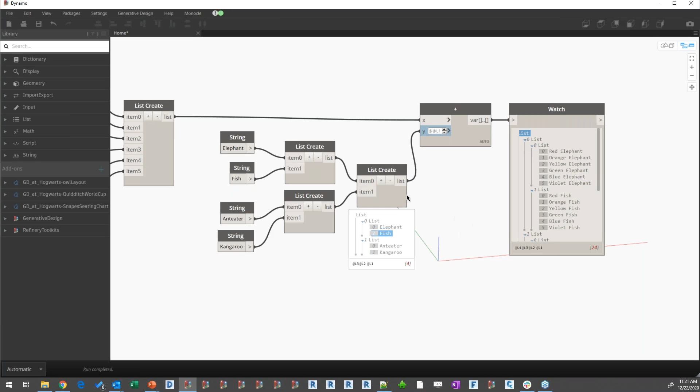And when I hit this, notice what happened to my list structure. I now have 4 levels on my list. I've got my first list here, which is the original list for all of this stuff. Then I've got this list, which contains my elephants. Outside of that, we've got the list that contains the elephant and the fish. We've added 1 level to the depth to attain sort of all the lists that we mixed with it.

But it does allow us to sort of more quickly get that content processed through. Now, a common application of this - let's say you guys had a list of files or list of values that you wanted to set from Excel into Revit elements. We've got 300 different parameters that we want to set on for 500 different walls, or maybe it's 5 parameters that you want to set on 600 walls, or whatever it is.

You could place an element set parameter value by name for every parameter. 5, maybe that's attainable. 300, you're going to go insane. Instead, you can handle all that data as one list and then just use list levels to make sure that it's processing the data for each of those pieces individually correctly. It is a little bit more complex because you've got that third input there, but it's definitely something that can be done.

All right, let's pop back over into the presentation. So we showed this stuff. Actually, this is the end of the presentation - this is the end of the slide decks that I had prepared for today. So do we have any questions in the chat yet? If not, we can try and pop over and give a Revit example of this.

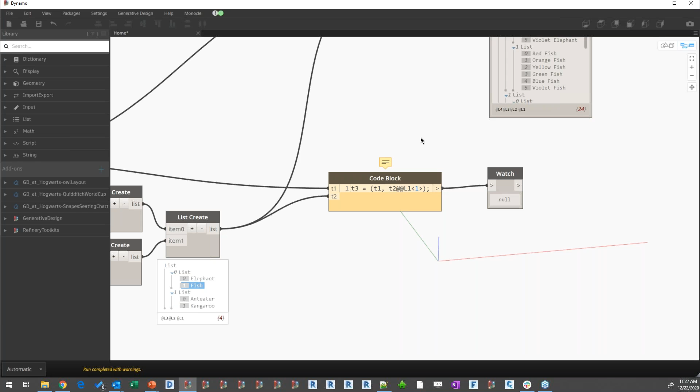Let's try changing this out for a plus, and then I think that should... yeah, there we go. So if you do see that add issue, that is something the Dynamo team has found and has already got a fix out.

So to tell it to work at a given level, it's that at sign. If I wanted to not maintain my list structure when we force the list level, it's a single @ sign. If you want to keep that list structure, it's a double @ sign. And in all cases, once you start to get specific about your list level, so it's at and then level 1, when you do that, you also have to start to manage your replication manually. So this is saying basically longest lacing by putting that bracket in carets like that.

Sol Amour's Dynamo DesignScript presentation has some more detailed examples of that, but hopefully that answered the question for you today.

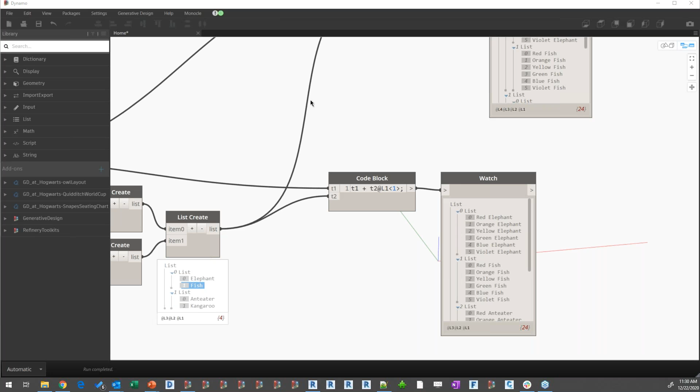Yeah, if you're using a laptop without a graphics card, you're going to have a few different issues. The first one being you're not going to see any of your background preview. Dynamo does really need a graphics card in order to work well. The second issue that you may start to see is there are actually, if you're not even seeing the node show up, like in your library, do you have a geometry menu?

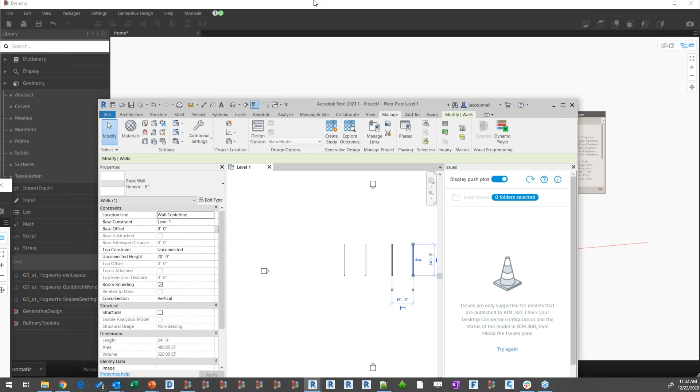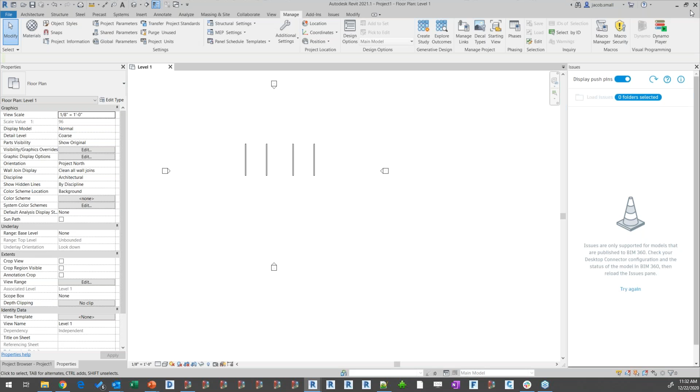Yeah. All right, and it looks like Fred is asking, is there any AutoCAD applications? Yes, there's actually a lot. You can actually leverage Dynamo with Civil 3D directly. So if you've got, actually it's not just Civil 3D, Civil 3D or Advance Steel directly. So if you've got access to either of those AutoCAD verticals, you can launch that way. Once you're in sort of the Civil 3D environment, you open the DWG you want to process, open Dynamo for Civil 3D or Dynamo for Advance Steel. If you have Advance Steel, you can do this as well, and then start to manipulate that content. If you don't have that, it's a little bit more difficult. I don't have it installed anywhere at the moment, but there's a package called Link DWG, which will allow you to manipulate Dynamo from the active AutoCAD instance from whatever Dynamo version you're in. So if you're in Dynamo for Revit, you can manipulate the open DWG in your other AutoCAD environment. It is a little bit less stable because of the core technology it involves. The documentation is a little bit difficult to get to work with, but it's definitely doable. In either case, I would recommend the Civil 3D version though. It's going to be like 1,000 times more stable. And if you've got the AEC collection, you should be able to launch that, I believe.

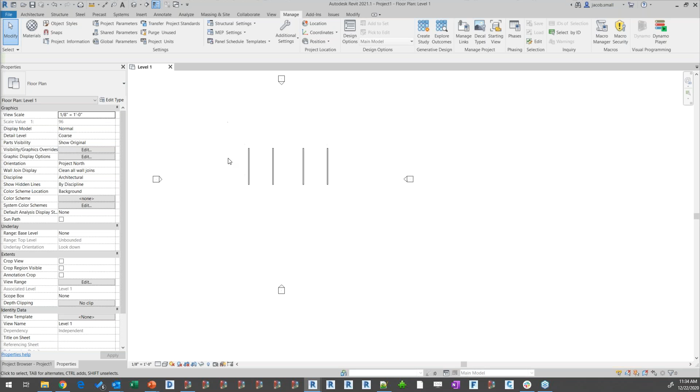All right, so we'll get started with this. So you can see I've got 4 walls here, right? These 4 different walls, let's say I wanted to set a comment and a mark for each one of those pieces based on some external data or some other method that I've sort of worked up.

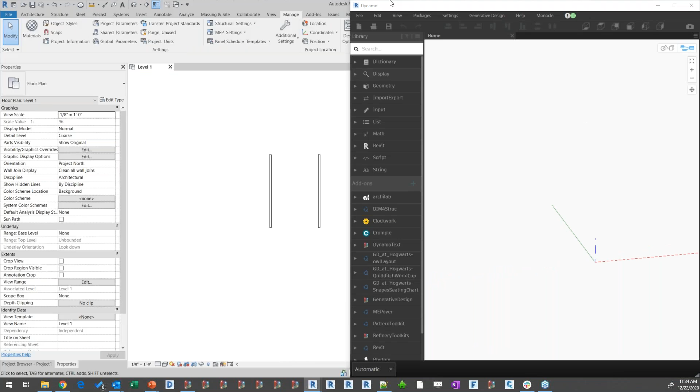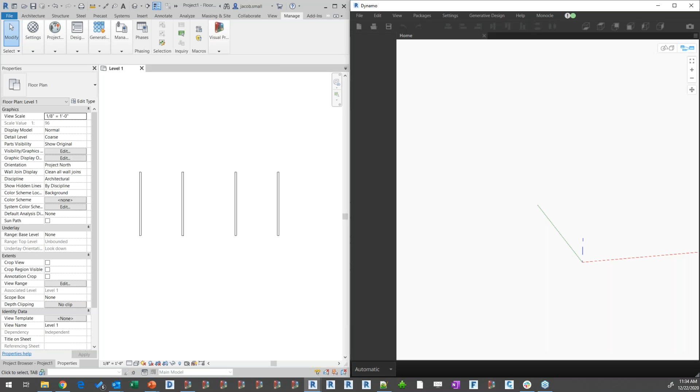So when I'm working in Dynamo Revit, I do this a lot. I like to split my screen where I can see Dynamo on one side of the monitor and my Revit environment in the other, and then I'll often go full screen with Dynamo once I start to go a little bit further. But it does mean I do like to minimize my properties palette a little bit, minimize my library palette quite a bit, just so I have a little bit more working space.

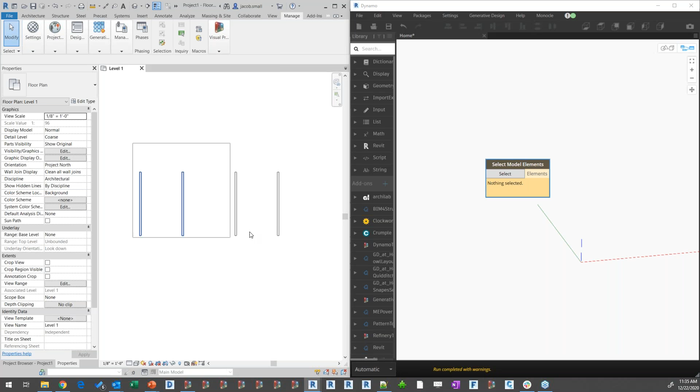So the first thing we're going to do is we're going to select some model elements. Come in here, and that's going to allow me to do box selection, right? So just like within Revit, if I go left to right, I've got to completely encompass whatever wall it is that I'm after. If I go right to left, I can do a cross. So once I get all 4 of those things selected...

We need now 4 new mark values. So the way I'm going to do that is I'm going to make a range from - we'll do design script for this - 1, 4, right? And I know 4 because I know it's 4 walls, but if I didn't, I could use a list.count.

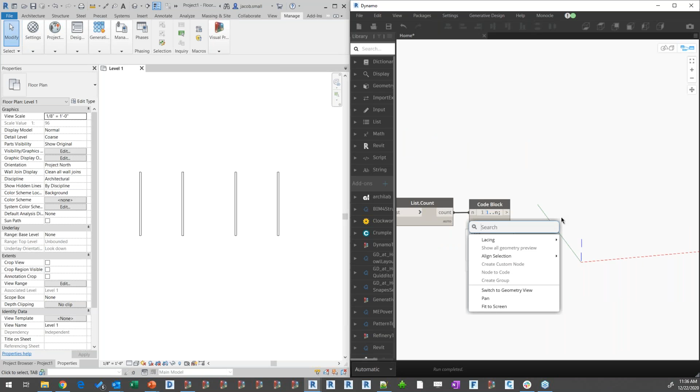And then instead of 4, we could use a variable here. Let's call this n. Start at 1, go to n, 1, 2, 3, 4, right? And then we're going to do another plus here, just like we did before.

And then I'm going to type a string. And I'm doing this in a code block, which means I have to incorporate the quotation marks as well as the semicolon at the end of the list there.

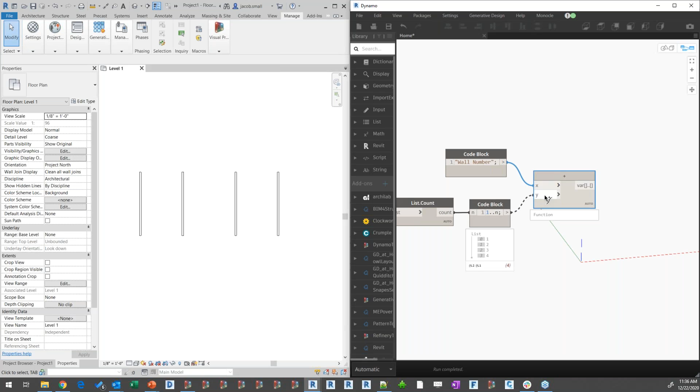And now when I join these 2 together - wall number, oh, look at that. Let's put a colon and a space, wall number 1 through 4.

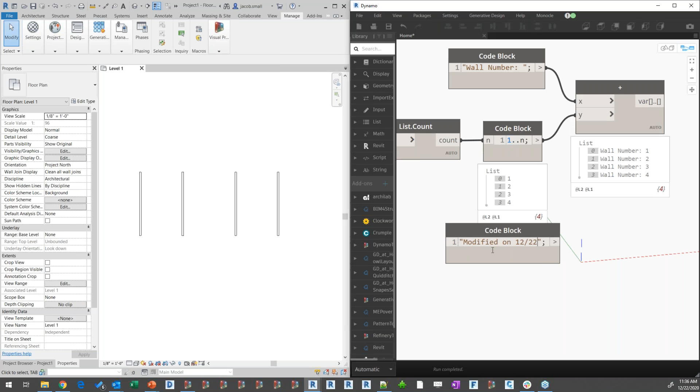And then let's set a comment value as well. So here, whoops, a bit big with my copy there. And I'm going to put that modified on piece right there as well.

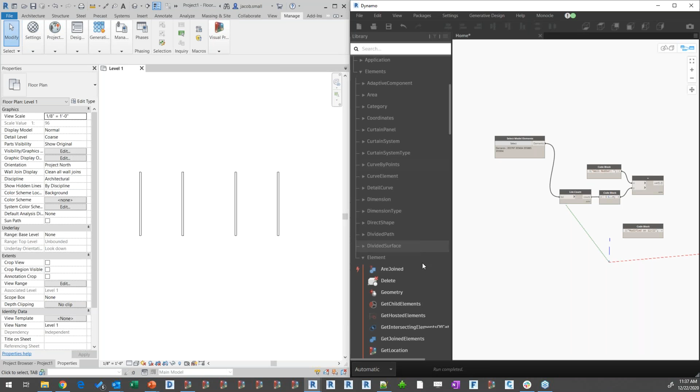Okay, so now I'm going to look to set the parameter value for those particular elements. So I'm going to come up into Revit, under Elements, Element. So I'm working with an element. Most things in Revit is an element, so we can do a lot of stuff in our Elements menu. You can see there's this set parameter by name node, right?

I'm going to go big on my Dynamo node because it's getting a little bit difficult in terms of the amount of stuff that's on there. So this takes an element as the first input, a parameter name, and a value.

Well, let's first take our parameter name of mark. We're going to use a string node for this, and then another parameter named for comments.

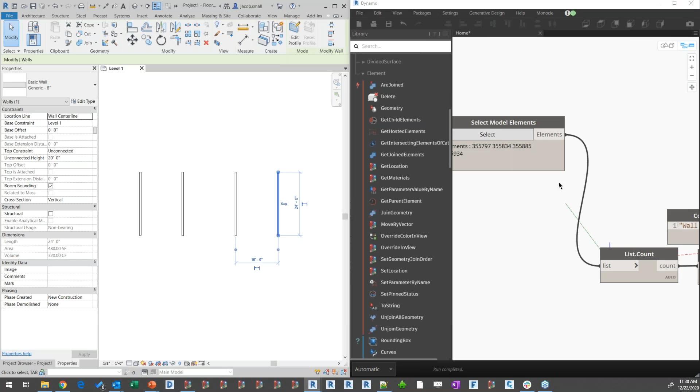Let's just see if we can confirm, do these pieces have a mark and a comment, right? So one way we can do that is you can come over here and look in the parameters for the active element itself. Remember, just like in Revit, if we want to set up a type property, we have to go in here and edit type. You're going to have to do the same thing if you want to set a type property in Dynamo.

The other way we can do this is we can take an item out of the list, and then we can say, element, what are your parameters with an element.parameters node. And this is a list of every parameter that that element has, everything that I can modify about that element by just feeding a new value, right? So it's got its category, it's got its base offset, its area, image length, right?

All this different stuff. Now, some of these are going to be read-only, right? I can't set the length, I can't change the category, but it does store that parameter for us, which is really good. So you can see there is a comments with an S parameter, and there is a mark, no S.

I'm going to create a quick list.create to pull the two names of my parameters together, give myself a little bit more room, and then it's going to ask for a value. So now I need a list of these items and these items.

Let's actually modify this. I want to have a whole list here. So 22... minus n. And Dynamo's not able to run because I've got a Revit command active.

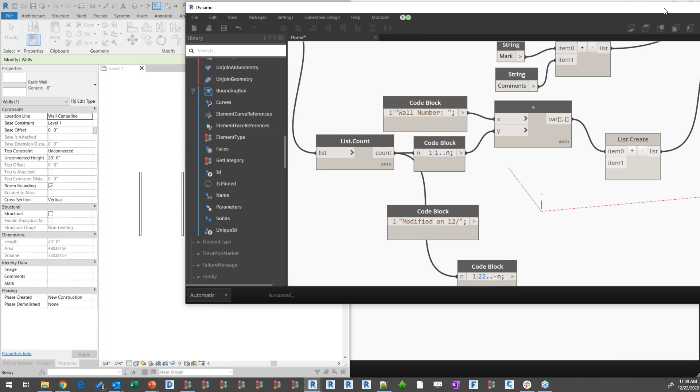What is happening? Looks like Revit is in the midst of forcing me to quit. Sorry about this, guys. Let me save this and see what happens.

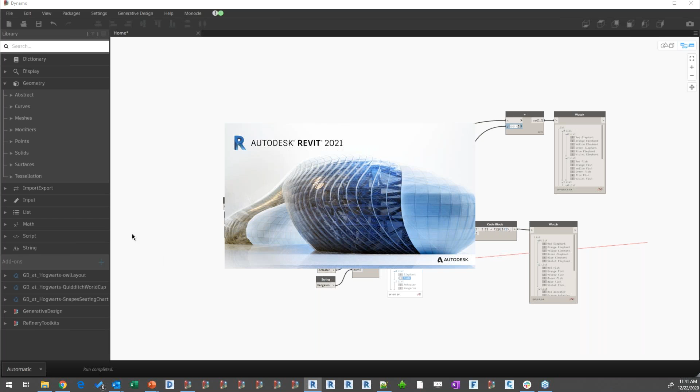So it looks like Dawn is asking, can you go over using the pound sign when using range in a code block? Absolutely, that's an easy one we can cover while that builds up.

So the basic syntax of building up a range in a code block is: what number you want to start at, two dots, what number you want to end at, two dots, and what number you want to step by. So now I can use some numbers. Let's start at 0, end at 12, step by 2.

And I don't have to put those in as variables, right? I can put them in as hard-coded numbers if I want to.

Notice if I say end at 11, but I don't get there based on my step, it's not going to include that last number. What I could do instead, if I knew I wanted to end at a given number, but I knew how many steps I wanted, we could use a pound sign right here. And this is now, instead of going to say start-end, it's now going to be start-end-count. And we do have to have that pound sign, that hashtag sign, in there.

And this is a count of 2. More likely, instead of a count, we would want to say end minus start divided by step.

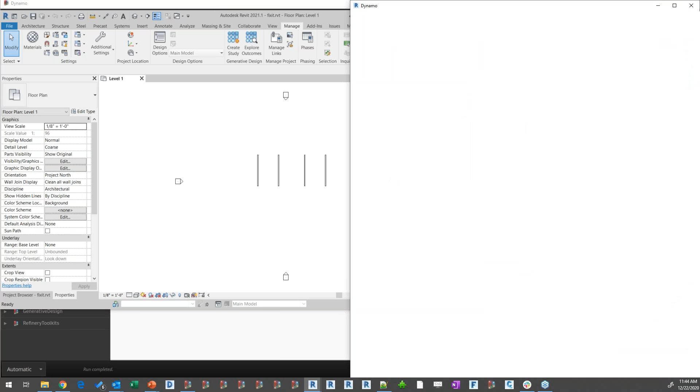Okay, so it looks like Vincent is asking, how do you compare a linked Revit model parameter value to an existing model parameter value?

So if we wanted to compare a value of a wall, let's say I had this wall in a link and I wanted to compare the mark on the wall in the link to the mark on the wall in my model, what I'd have to do is get the linked element out of the link.

Genius Loci has some great notes for that. Archilab has some notes for that. Bimorph has some notes for that. There's a dozen different ways - I think Rhythm and Clockwork have some notes for that too. A dozen different ways to sort of start to expose those linked elements so you can work with the actual element itself.

You can't work with the link holistically, right? Your link object is one thing, but then we have some additional pieces inside the link, and that's really what we're after. Once you have those two, you can start to compare the two pieces. Now the key piece is, how do I know which ones I want to compare?

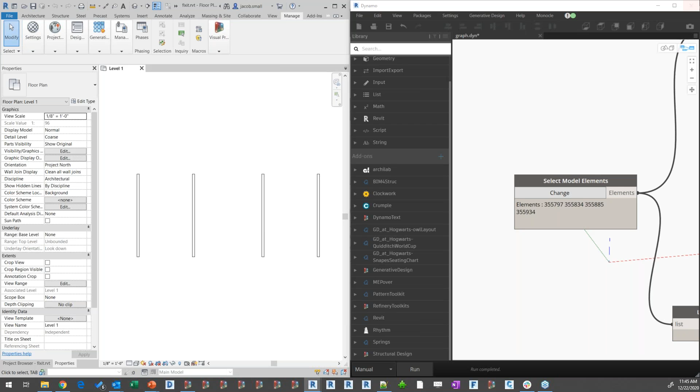Because if I say get me this wall and get me that wall, there's no guarantee that unless you're manually selecting those two pieces, that you're comparing the right values or the two right elements. So a lot of times what you'll wind up doing is using the GUID, the globally unique identifier, to make those two pieces consistent. But you do have to select the element in the link rather than the element in the model itself, or the link model itself.

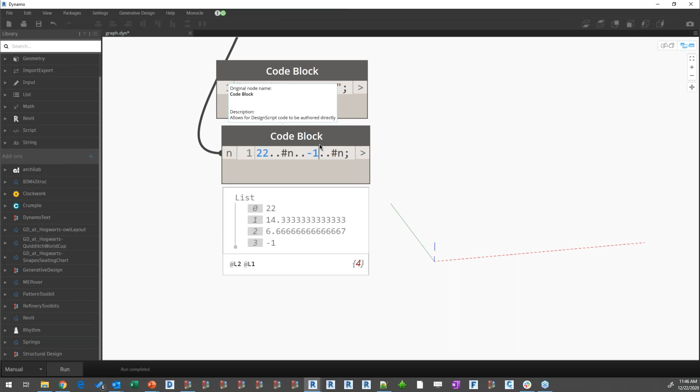So you can see here, 22 minus n is going to go ahead and give me the values from 22 to 18. We can also say 22 minus 1 number n, and this is probably more likely what we're after. 22 number n minus 1 - my bad, there we go. 22, 21, 20, 19, and then we can just use the same plus node that we've used before a couple times now to join those two strings.

1222, 1221, 1220, 1219, and then we'll bring this guy in here. So now we've got the list of all the values that we want to join up in one list, and we've got the list of the marks and the comments. Now let's go ahead and wire our elements in, and let's see what happens. We're going to watch the mark and comment field, right? These two fields right here that happen to be next to each other - that was intentional on my part for once.

Here we go. Now I'm going to hit run, and it only pulled through the wall number, right? Why is that? Well, we've got a list levels and lacing issue going on here, right? So what we want to do is try and adjust those list levels.

Now, one thing that's going to be pretty tough is the way I have these set up. I've got mark, comments, and over here - whoa, if I set that as my mark, that as my comment, we're good, but it's not sort of paired up by the element. Let's try a list.transpose.

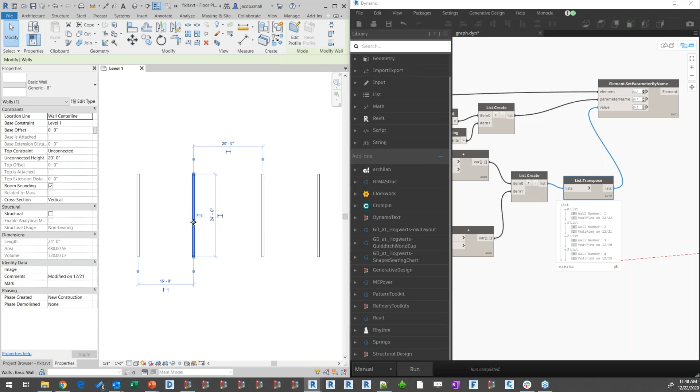Turn these guys around. All right, that's looking a little bit better, but what do we get over here? Still the same content. Let's set this down to at level 1, that to at level 2. Modified on 1221, we're getting a little bit closer. Let's set this at level 2 as well, and let's see how that runs. Wall number 1 on 1222, 1221, 1221, nothing and nothing. We're starting to get there. I'm going to take this, clear these values out.

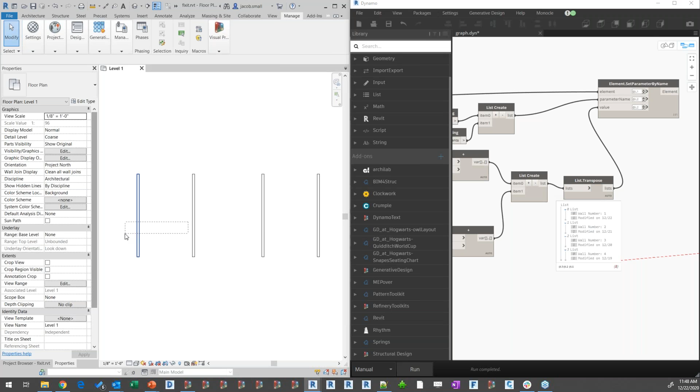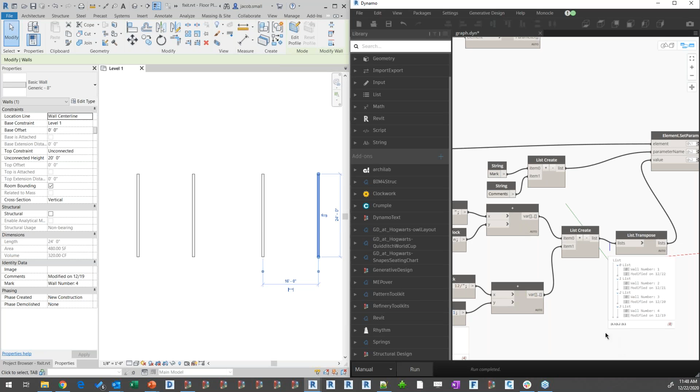And now we're going to say lacing to longest. 1 on 1222, 2 on 1221, 3 on 1220, 4 on 1219. Right, so the same order that they were sort of grouped up all seem to work. And again, that's just a matter of changing that list level and lacing. It wouldn't matter if I had 300 parameters, as long as I had 300 sets of values here, we'd be good to go. So that's a fairly classic example of when you'll need to make use of list levels and lacing, with some added code block fun in there as well.

Cool, any other questions? Not yet. So if you do have questions, definitely type them in. Oh, Heather just sent one in.

So Heather is saying, we have a common issue with Revit warnings saying elements have duplicate mark values. This is usually coming from our many light fixtures placed in the model. Can I use a similar method to change all these mark values to be different? Yes, yes, you absolutely could.

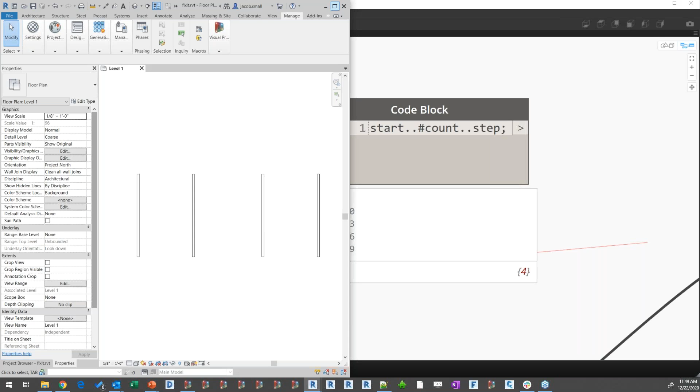So let's take an example of that. I'm going to minimize this, we'll maximize this back up. I'm going to copy these walls so that we've got many, and I'm going to highlight them all. I'm going to change all my comments to the letter A, or all my marks to the letter A. Elements have duplicate mark values - so now I have the warning which you have, right?

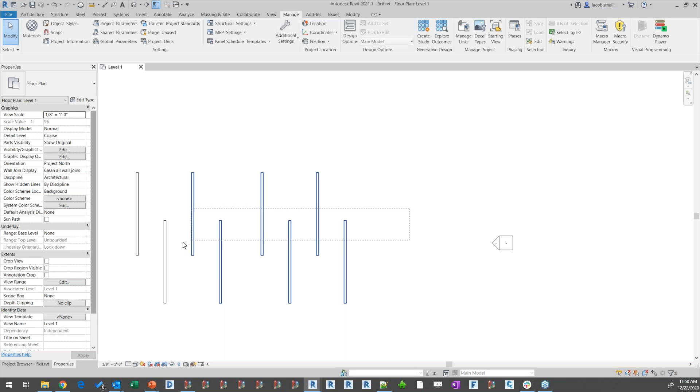All right, so there's a couple different ways you can do this. I do recommend looking into the archi-lab package, which has some great nodes for working with warnings. You can also just export out your list of warnings to HTML, use Dynamo to parse the HTML and get the elements in question. The archi-lab one's probably a little bit more user-friendly.

So I'm going to take all of these guys, pull Revit off to one side once again, and we'll zoom extend on those. I'm going to do - whoop, this is the wrong Dynamo. I'm going to do a save on this, and we're going to go ahead and say new. And then once again, we're going to say select our model elements.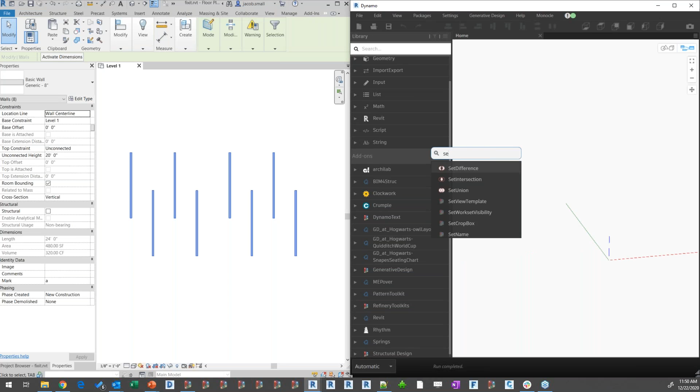Element.parameters. I'm going to pull out the first item from the list using some design script. This gets me just one, using indexing, by putting it in the brackets like that, saying the item at index 0.

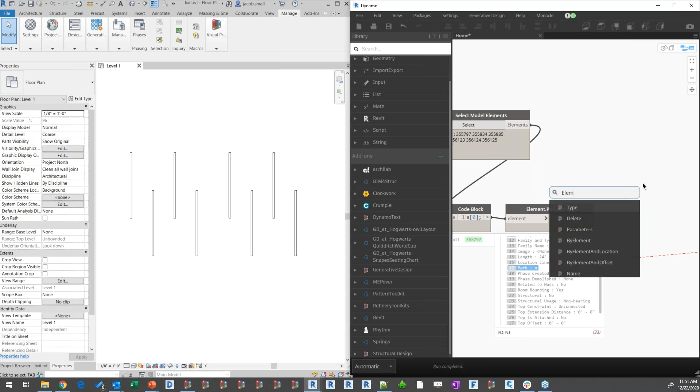If I pulled open this list, it's just going to pull that 355797. Let's look at what the parameters are, just so I know how the parameter I'm after is really spelled. Element.get parameter value by name.

Let's look to make sure that these all have the same mark value. All of these have the mark A. Let's change some of these so that these have B. Okay, so now you can see I've got some A's, some B's. They're kind of shuffled all over the place, which isn't great.

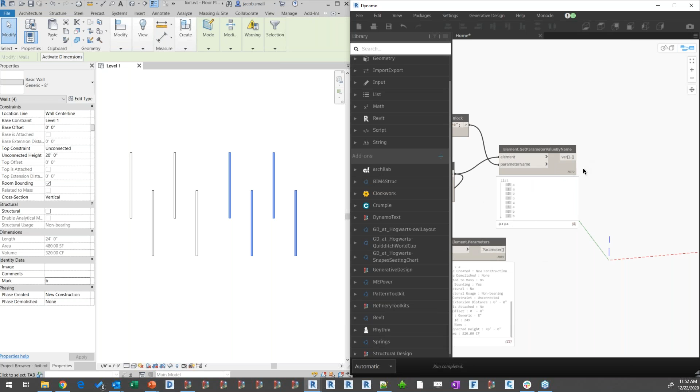I really would prefer if they were grouped by their piece. We're going to do some list manipulation. There's actually a node called list.groupByKey, which is under the organize section of our list library. This is going to take a list of items. We're going to go back to our raw elements and allow us to group it by whatever key we want.

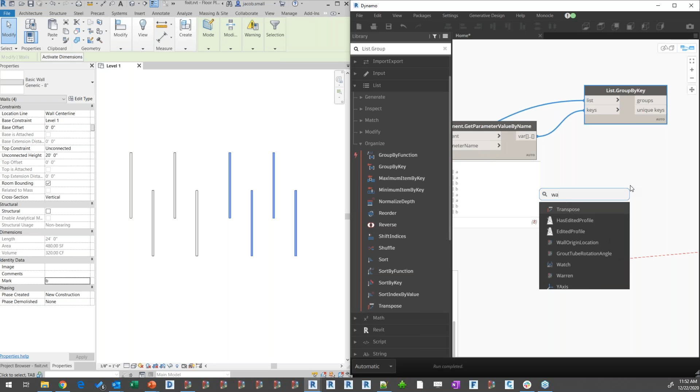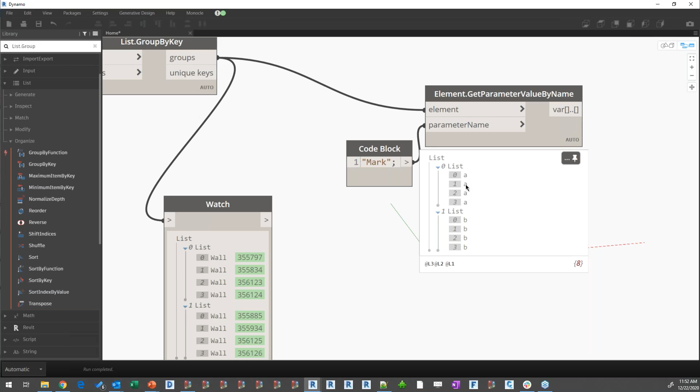Now you can see I've got sublists, right? Sublists are great. This means I've added some additional structure to my data. Now these items are grouped by whatever their mark is, and we can confirm that by dragging this over here as well. When I do the drag copy, that's just me hitting Control on my keyboard. But you can see I've got all my A's and then all my B's.

All right, let's say I wanted to add a new value onto the end of that. We're going to start at 1, then we're going to go to N. We'll use a list.count. Here we go. Let's count these items. There's 2. I probably don't want to work with just the 2 though.

I probably want to work down here. How do we fix that? List levels. Use levels right there. 4 and 4. Now we've got 8, right? 1 through 4, 1 through 4. Now let's join. We're going to put our suffix number at the end of our letters. I don't need to worry about lacing here because everything's kind of a matching list structure.

Set parameter value by name. Here's my list of elements, and here's my values. Again, everything's always in that 2D list structure, so you don't have to worry so much about that. The last piece I need is this.

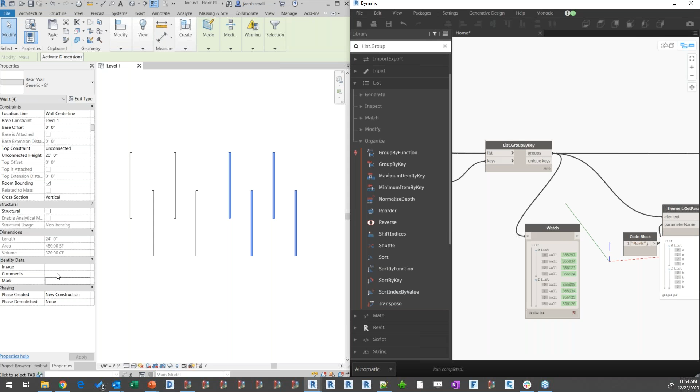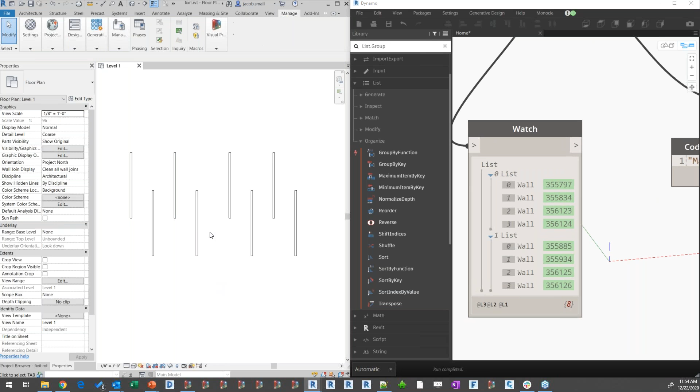Mark's no longer highlighted for all of these. B1, B3, B2, B4, A1, A2, A3, A4. Now the order on those is the order of the element IDs, which is the order they were theoretically created in the database. That might not be the order you want to use. Maybe it is, but in any case, the original question was, can I not have a warning? And sure enough, there's no longer a warning associated with that element.

You want to be a lot smarter than just appending a 1, 2, 3, or 4 to the end of that, though, likely. Hopefully that answered that question.

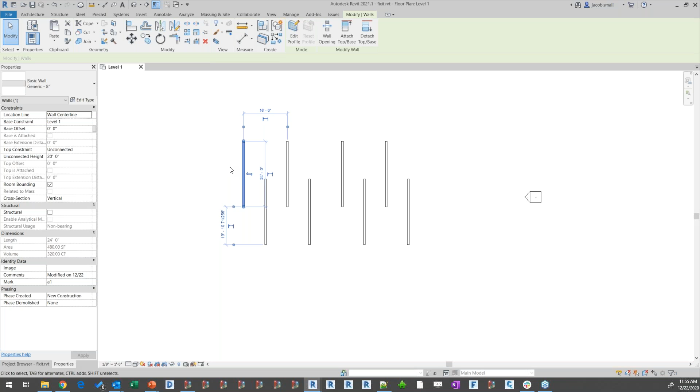All right, we've got a compliment here. It says, Jacob, good job explaining Dynamo. We have Civil 3D package, do we need to buy Dynamo? No, Dynamo is free and open source. If you have Civil 3D as your primary authoring tool, just go into manage.autodesk.com and you can get the Dynamo for Civil 3D installer there. That's the only one that's sort of deployed out differently from the others.

For those of you using Civil 3D, Stephen asked if we could give some examples of how to use Dynamo with Civil 3D. I posted a link to 3 courses on our Customer Success Learning Hub that are completely free, and you can try the examples yourselves.

One good Civil 3D example I've demoed a few times: could I set the layer of trees on a site based on their distance to a building? When doing a development, you want to get rid of all the trees within X feet of where you're going to put the building, or on the roadway, or in the building. Maybe not, maybe you want to build around them, but typically you want to just get rid of them.

It's a pretty fun graph to write, and pretty simple. Get the shape of the roadway, get the shape of the building, get all trees within 5 feet, 10 feet, whatever distance you want to pull back on, then set those trees within that distance to the demo layer, and everything not within that distance to the existing-to-remain layer. It works out really well, and would have saved me a ton of time back when I was practicing. It's one of those tools I wish I had back in the day, but yeah, it's a pretty good one, and a good learning graph too.